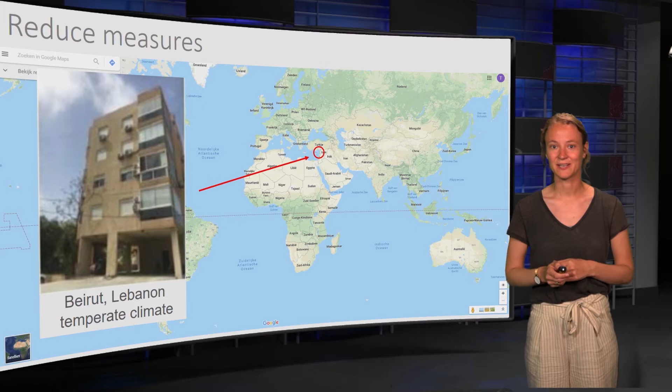The first example is from Rana. Rana lives in Lebanon. Since she lives in a temperate climate, Rana's measures were selected in order to limit the use of cooling during the hot summer months, while maximizing solar gains during the winter. As first step, insulation is added to the outside of the building. Together with double glazing, this reduces the transmission losses through the building envelope.

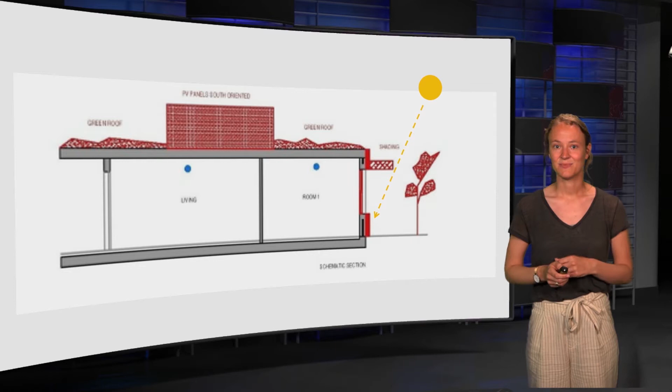To reduce the demand for cooling, Rana created overhangs above the windows. Beside that, vegetation is placed in front of the windows and a green roof is added. Finally, Rana uses cross ventilation. In this climate, cross ventilation can be beneficial when used for summer night cooling. In this way, the fresh night air cools down the building.

A more extreme climate is found in Kosovo. This continental climate is characterized by the large temperature differences, varying between minus 27 degrees and plus 39 degrees. In the house of Primessa, the living areas are located on the warm side of the house, while the corridor, kitchen and bathroom are located on the windy and colder north side. Trees are added to weaken this wind.

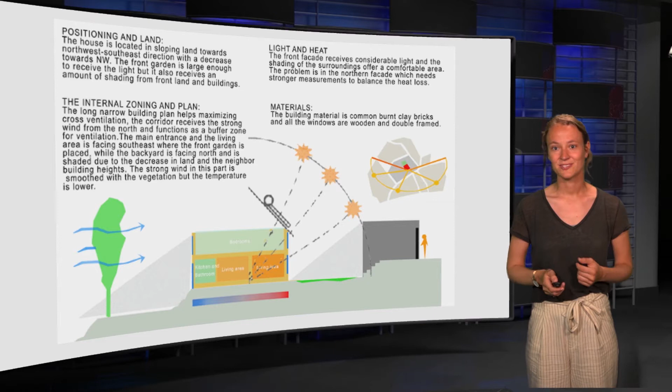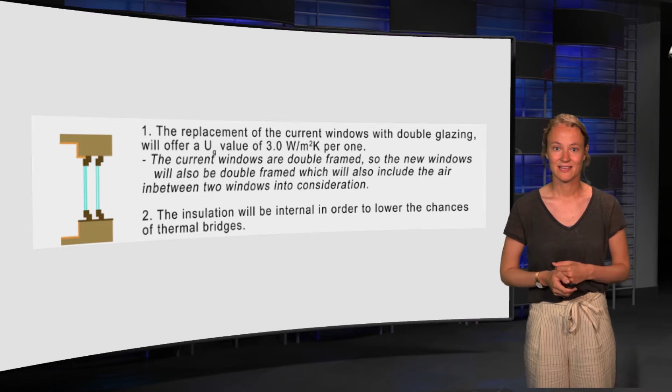Thereby, the northern side requires a more extensive renovation to lower the heat losses. This will be reduced by replacing the windows with double glazing and by insulating the building envelope from the inside. Beside that, Primessa implemented another measure, a solar chimney. In the top left image, you see how this south-facing chimney is attached to the building. The air in the chimney warms up, creating a stack effect, extracting warm air from the building, while fresh outdoor air is pulled into the building.

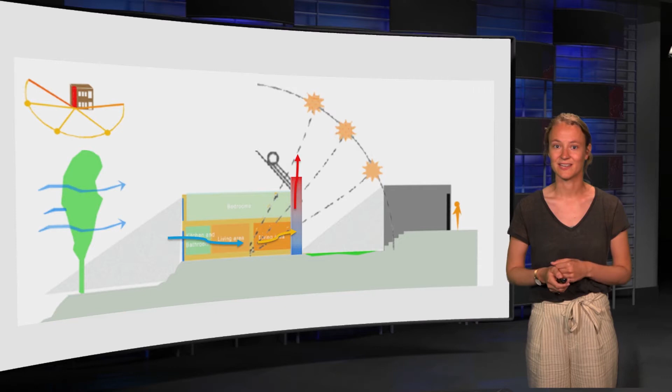There are also other ways to reduce the need for cooling. In this climate, movable solar shading is a good option to block the sun in the summer and to allow solar gains during the winter.

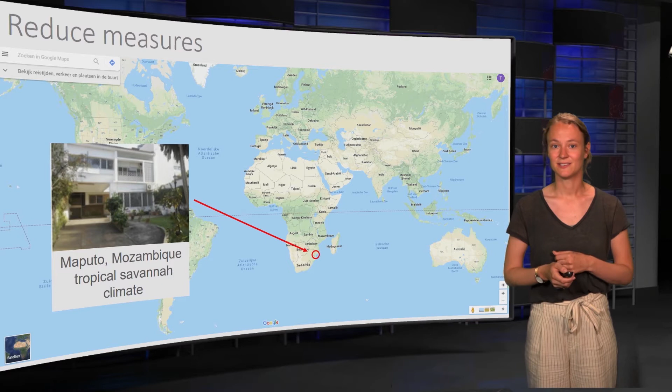For the tropical savanna climate of Mozambique, João selected multiple passive cooling measures. In his city, the average temperature is 23 degrees, with limited variation between summer and winter. Vegetation is placed in front of the balconies to provide shading to the balconies and the bedrooms. The other windows are shaded with overhanging structures. Currently, the rooms below the flat roof part of the roof are very warm. Therefore, an additional roof is added to shade this roof.

Cross ventilation should be used to ventilate the air cavity between the two roofs. The student also added PV panels to generate electricity. However, this isn't part of this week. The produce step will be discussed in week 5 of the course.

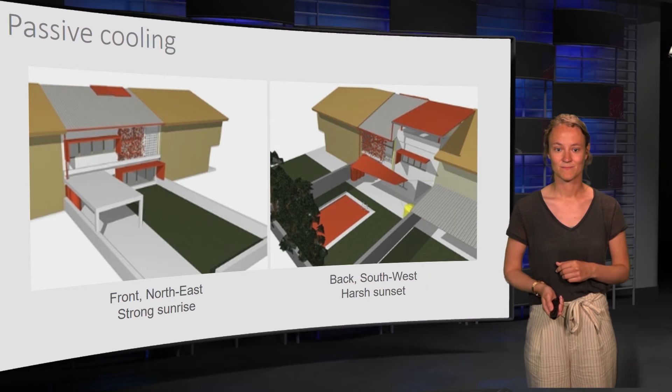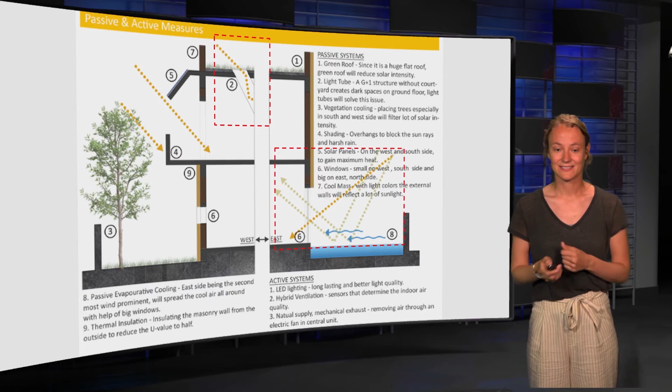Beside the reduction of the cooling demands, the electricity used for lighting is reduced by solar tubes that provide additional light to the ground floor, reflection of daylight by the water feature, and by the use of LED light. Now Andy will show you how to determine the achieved energy savings.

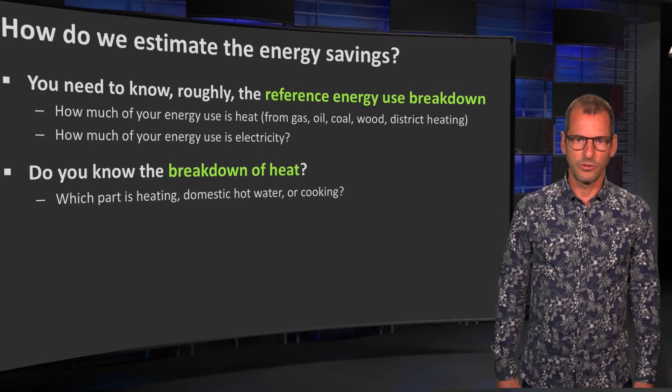Hello. This week we had a specific question by some of you, how to calculate the possible savings of your proposed energy saving measures. There's a few steps you have to take then. First, you need to know roughly, of course, what the reference energy use breakdown is. So how much of your energy is related to heat, which may come from different sources, and how much is used for electricity. Then, of course, you need to know what is the breakdown of the heating energy.

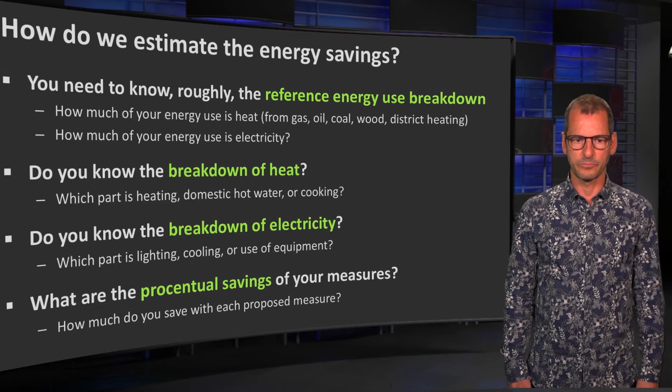So what is used for domestic heating, what is used for hot water, and what is used for cooking, for instance. The breakdown of electricity is also something you need to know. So how much is used for lighting, how much is cooling, and how much is the use of equipment. Finally, you need to estimate the procentual savings that you propose with all the measures that you have taken into account with your design this week. Now, there's an option, of course, that you don't know the total energy breakdown, which I hope you don't, but it is possible.

Then we have to look at the different climates, and I only took 5 main climates now, but it's just as an estimate to see what might be the division. In that case, I would assume this. So if you have a polar climate, which is a cold climate, colder than temperate. You have a temperate climate, a continental climate, a warm climate, which is also perhaps a Mediterranean climate. And then you have a tropical climate.

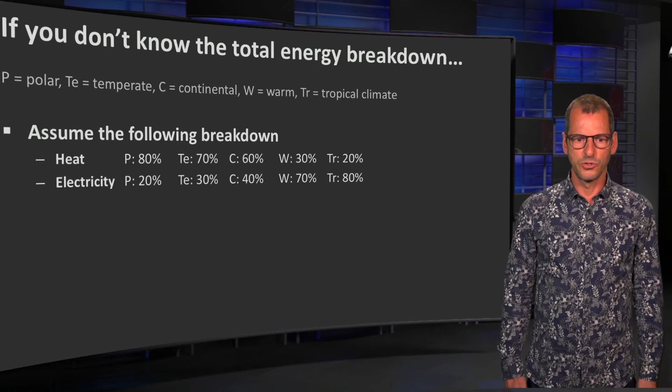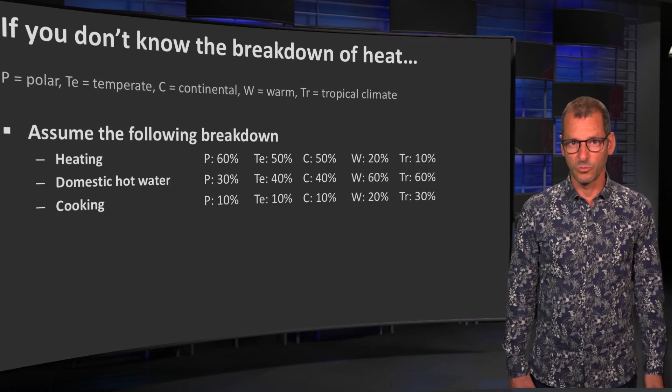Then you see that you could divide the demand for energy for heat or electricity according to this graph. So use that to have a sort of an idea of the division between heat and electricity. Next step, of course, is that you think about the breakdown of heat. If you don't know it now, you could use these figures, which are then again to be applied for the different climates. So look at how much you approximately need for heating, for domestic hot water, or for cooking as the main sources of heat in a building.

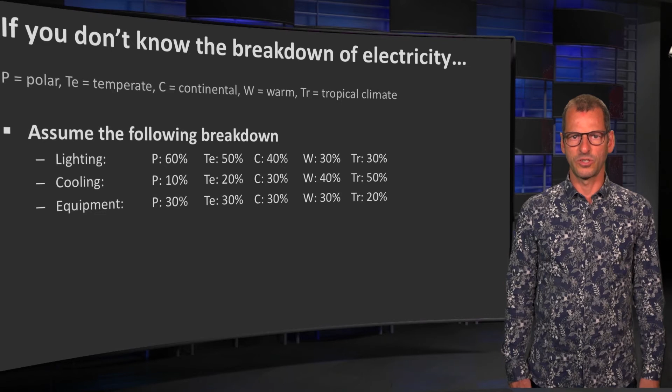Electricity, same story basically. You look at the different energy users in the building. Most of it is related to lighting, to cooling, or to the use of equipment. And you can use these figures, as stated here, depending on the different climates that you have your building in. And finally, of course, you have to estimate the savings of the measures you propose to your building. You can assume the following savings.

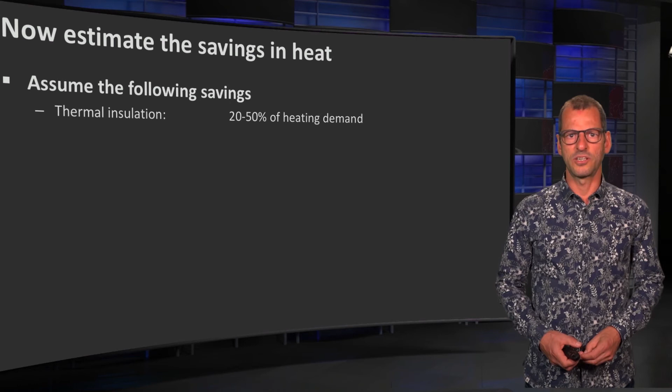For instance, thermal insulation could help you to save 20 to 50% of your heating demand. And this, of course, depends on how much thermal insulation you can add, the thickness of it, and also, of course, how much of your building is opaque in that sense that this is a part of your envelope that can be insulated. The second, high performance glass, so well insulating glass, which can be double glass or a triple glass even. That also depends, of course, on how many windows do you have and the type of glass you actually choose.

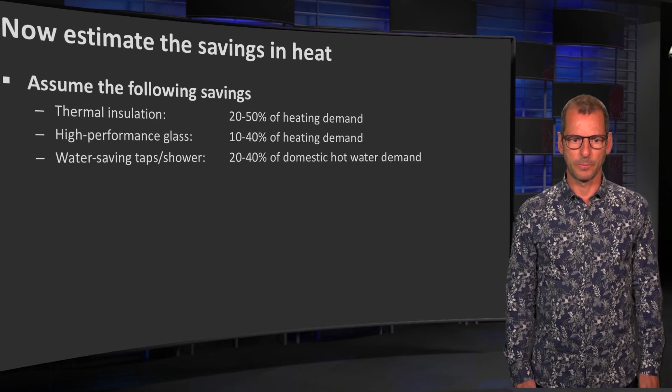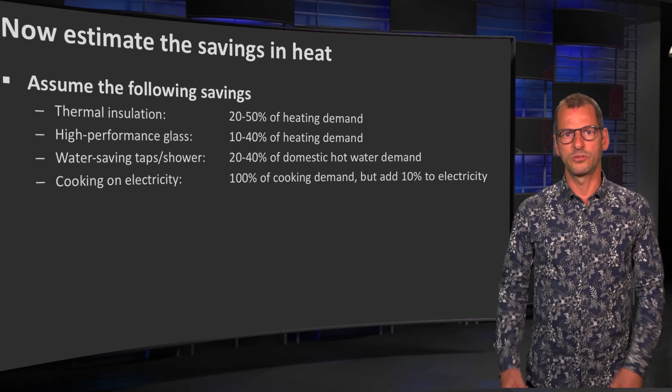Then you can save, for instance, energy for your hot water purposes by using water-saving taps or energy-efficient equipment for that. Thereby you can save on your showering or hot water usage in the building. The last one I want to show is cooking. You can shift from cooking on gas or on wood or on other sources to cooking electrical, which could also be induction cooking. In that sense, of course, you save all the energy used from fuels and it shifts to electricity. So the reduction that you have on heating, you have to add, of course, a little bit on electricity use. Now, if you also want to do a similar exercise for electricity, these are figures you can think of.

You could think of changing your lighting. If you have light bulbs right now and you replace them by fluorescent lighting, then you can save approximately half of the energy used. If you do use LED lighting, light emitting diode lighting, then you can save a lot, as you can see here. Of course, it's more expensive, but a lot of energy can be saved for lighting. Shading devices, of course, are important to reduce the heating up of your building and therefore the artificial cooling you have to install. So think about this figure, and it also depends on how many windows do you have, how is your building oriented. So you have to estimate it a little bit yourself. It's a bit about thinking brightly about it yourself and then using a figure that could be justifiable.

The same applies to a green roof. Many of you propose green roofs, which can, of course, limit the temperature going through the roof into the building and thereby saving the cooling. It depends, of course, how many floors you have. If you have more floors, your roof is relatively smaller and then has little influence. But if you have one floor only, then of course it can make a big difference. Estimate it yourself. And finally, of course, there's energy saving equipment.

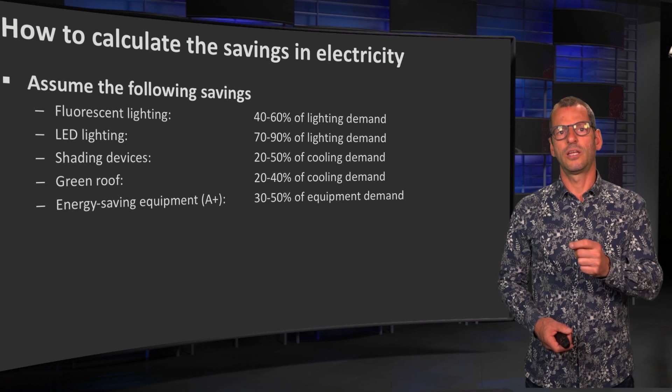Not just A or A+, can also be A++ or A+++. And this equipment, of course, can save a lot compared to your other devices. And I'm thinking about fridges, freezers, TVs, etc. So if you use those, you can save up to 50% of your electricity use for that part. Now, if you combine them all together, so you calculate the fraction of heating, the savings in heating, and then add up the savings that you can estimate through electricity use, then you can sort of make an estimation of your total savings by this first step of saving energy.